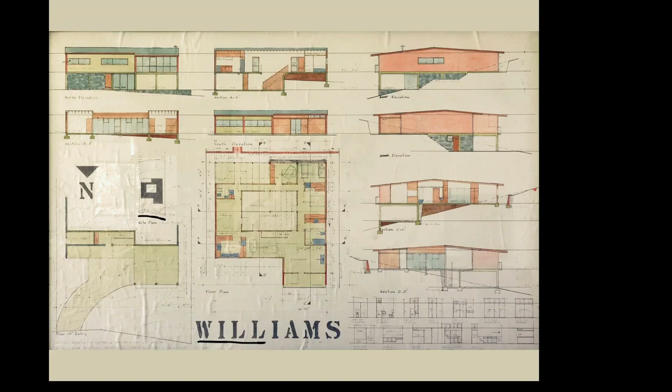In 1956, the Williams family engaged Peter and Dione McIntyre to design a courtyard house for them after they returned from a Mediterranean holiday. The house is in Studley Park, Kew, and was finished in 1959. And I bought the house from them 49 years later, in 2008.

Living in the house for 12 years has allowed me to slowly digest what really needed to be done and what were the priorities. The backyard was so steep, I never allowed my kids to go to the back because they would just fall right through. In turn, they played in the courtyard, which was what it was designed for. But because it was all paved, it didn't have that sense of connection to nature.

While the house focuses inwards to the courtyard, it was completely disconnected from the backyard visually. For as long as we were there, I never felt that I actually owned the backyard when I paid for the entire piece of land.

The floor plan quickly: north is to the left, and the green shaded bits are my extension. Coming up the driveway is a sliver of a floor, if you call it a floor, entry into this space, and coming up the stairs. Once you're up the stairs, it's the living room of that photo you've seen before, with the elm tree out at the front. We call it a donut house. You go round and round. Every part of the floor plan is circulation.

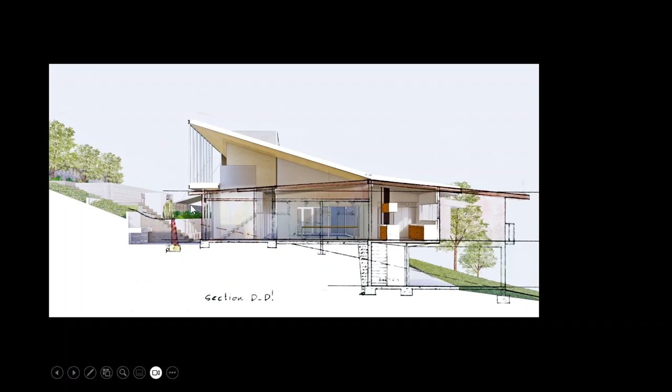The footprint of the existing house was quite modest, typical of post-war houses of that era. Rooms are small, corridors are narrow. Therefore, I was guided by these finite dimensions which govern the whole design. I was so pedantic about following the structural set out that I limited myself to follow the existing eaves line.

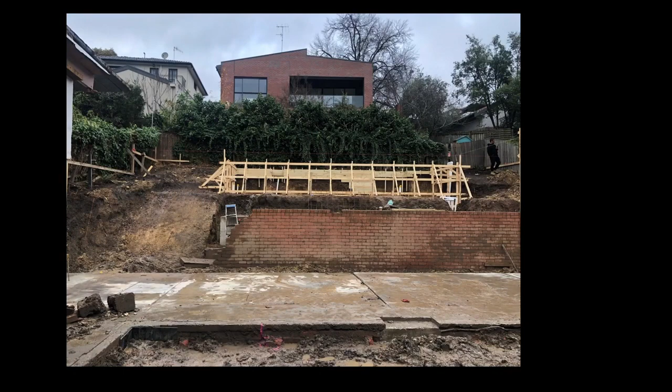The site is rather steep. From back to front, it's 10 meters in elevation. Because it was so steep, during construction everything had to be craned in from the street over the old house. We craned in bobcats, everything you name was craned. This was the result of the terracing and the swimming pool formwork. And the view now from the pool to the new floor.

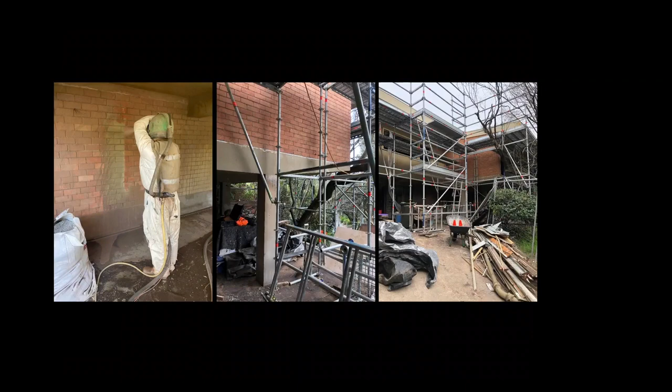We used a soda blasting technique to slowly strip back the paint to reveal the original brickwork. It protects and avoids damaging the original bricks and the mortar. This part of the project is largely about restoration. At the same time, it's about upgrading the building envelope to a modern standard.

We lived there for 12 years with absolutely zero insulation, nothing. So we removed the entire roof and replaced it with 100mm insulated panels. The underside of the cantilever slab used to be a heat sink. Imagine a concrete slab with no insulation. So we sprayed it with a 60mm thermal spray. All the walls internally were removed and insulation put within. This is not about compliance, it's about me understanding I actually need that, and we double glazed everything.

The courtyard has really shaped our family life. It's the central focal point of the house, and my kids practically grew up within it.

It is also the lung of the house. When all the doors and windows are open, there's this fantastic cross ventilation; you can just feel the wind kind of pass through. We've turned this previously fully paved ground into more of a properly landscaped garden now. And after 18 months, it's thriving, and I'm turning into a rather obsessive gardener. I'm really just cutting every weekend.

During the design stage, I became fixated on the idea that this upstairs volume has to be both visually and physically connected in both directions. Effectively turning that upstairs into more of a sheltered outdoor space, if you like. That's when the idea of a drawbridge was born.

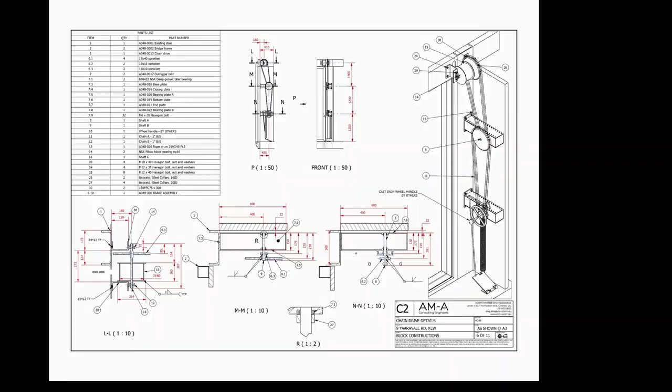So the first step, I found an engineer, not the project engineer, because he refused to do me a drawbridge. It was so hard to design this mechanism. And all of a sudden I had to start learning about gear ratios and parts and sprockets and all this crap. And then second step, we found this myth of a man who is pretty much a legend in modifying cars. So for at least 3 months, my office can tell you, I spent countless mornings in the workshop in Heidelberg, drinking espresso with him, trying to figure this out. And yeah, I was missing in the office for 3 months.

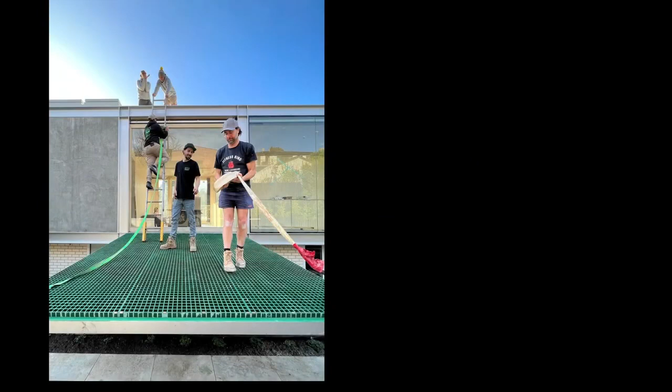Meanwhile on site, by this time, we had actually already moved back and were living in the house. The boys from the builder were actually not getting paid for this. It became more of a love job for them. They wanted this to work as much as I did.

That's 8 minutes, if you could wrap up.

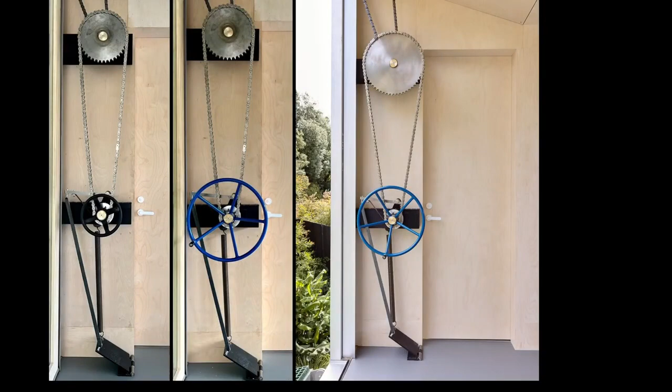Oh, really? Oh, shit. Install day, with the myth himself, it didn't work the first go. We had to upgrade 3 more times to make it work. It took us 11 months to do this. I'm not the first one who did it. We have seen it before, but I won't be the last one either.

Did you say 8 minutes? Yeah, that's time. Yeah, here you go. If you just want to flip through maybe, and then, yep.

And under the bridge, it lets the light through. When the bridge is closed, we actually lock the bridge. We don't use it every day, so that the kids can't operate it. On our street, there are many modernist houses, and what we are all trying to do is to protect this great period of residential architecture. All the neighbors have this sense of presenting that back to the public domain, and we've done our part. Right.